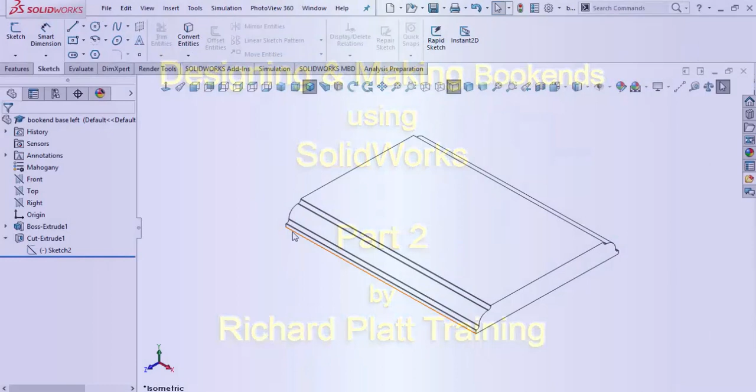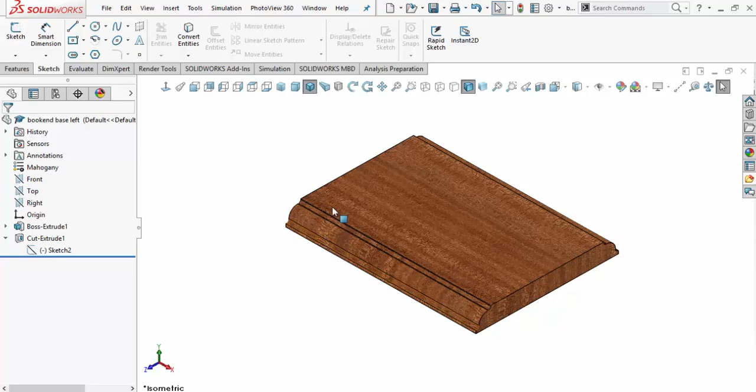Okay, now what we need to do is to make our Roman Ogee go in the opposite way. So it's going to be actually coming across the end grain. So let's go back and make sure we see our shaded view so we can kind of see what we got here. So I'll come back and click on that. Yeah, this is our cross grain right here. You always actually cut that part first when you're using a table router. So, well, anyway, we designed it this way, so we got to go back now, make that Ogee cutting across there. So I'm going to go back where I can see a little bit better.

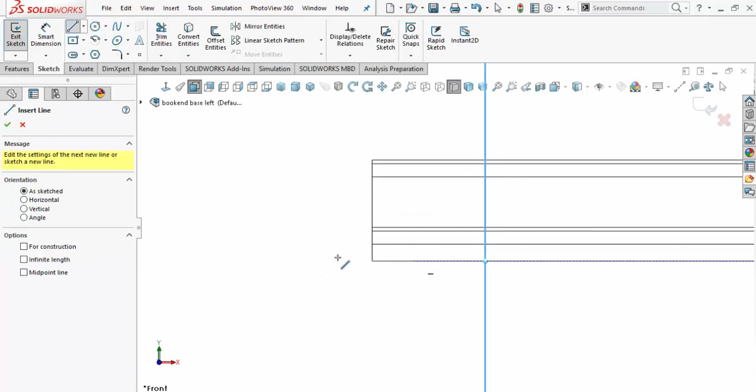All right. So now I'm going to hit myself on this one. Actually, let's go to the right view. Let's see where we are now. I don't want to go that way. Let's go to the front view. Yeah, that's what I want. Let's set ourselves normal to that. I'm going to teach you a new way to make an extrusion that might be a little different, but I think you're going to like it. So let's come up here and let's start designing our Ogee that goes across the cross grain.

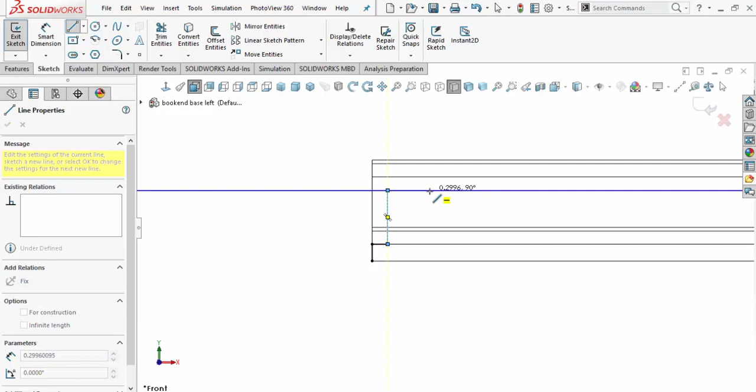So as I come up here and snap, you notice that at 90 degrees it says 0.2996. That's good. So we're going to go ahead and click on that. That's a good feature I can grab. I'm going to come over here to just about right there. I'm going to come up somewhere up in here and make one. I'll come over here and I'll just make one. And oh man, I kind of messed that up. So I go all the way up here to that. I'll put a point in. Now I'm just going to continue around, putting in these arbitrary points to make myself an enclosed shape.

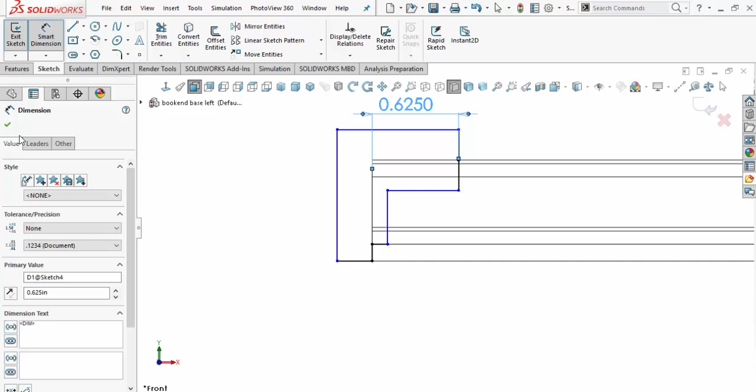Okay. Now let's set some smart dimensions up so we can make this guy work for us. I'm going to come up here on this line, come over here to the end of the wood block, and I'm going to set that to 0.625, which would be 5/8 of an inch. Come over and do that. Okay, that looks pretty decent. We already know that that's correct. What I don't know is this dimension right here. So I'm going to go ahead and I'm going to assume... I'm not going to assume anything. What I'm going to do is I'm going to just check that off, and I'm going to go back and look at that other sketch.

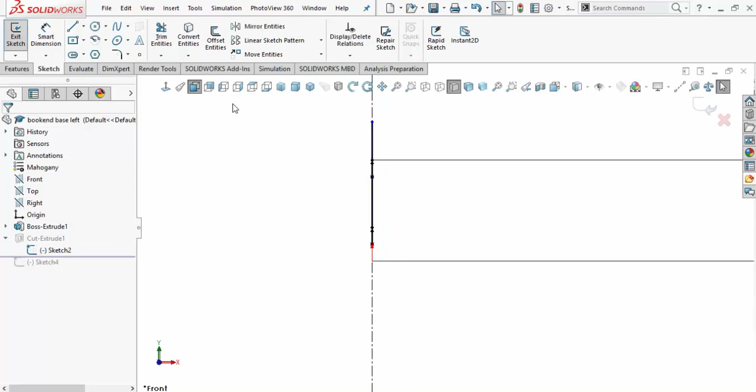So the way I would do that, let's rebuild this real quick. Got to make sure we get this right. So what I'm going to do is I'm going to come back up here, and I'm going to back up on my feature manager. I'm going to exit. I'm going to go ahead and select that sketch 2 and say edit. All right. Well, where is it? Okay. Let's go ahead and change it around here so we can see it. Ah, there it is.

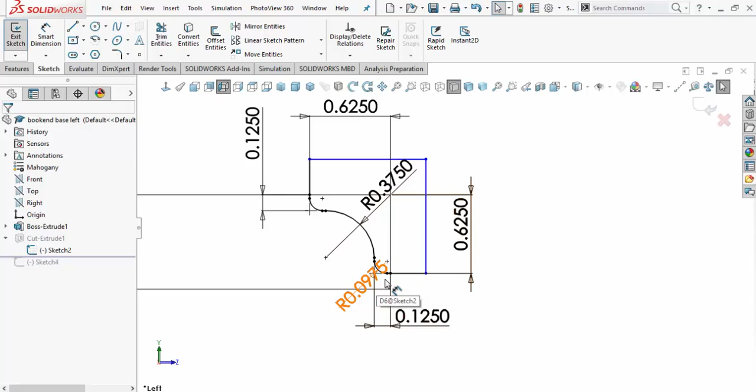Okay, so I set that to 0.625 here, and I set it to 0.625 there. Okay, I think I can figure this out. Got a radius on the Ogee of 3/8, which would be 0.375. And I've got my fillets at 0.0975. Okay, that makes sense. So we'll go ahead and rebuild our sketch. We'll go ahead and pull our feature manager down so we can see it and suppress it. We're going to go ahead and get ourselves back to, I think, our front plane we were working on.

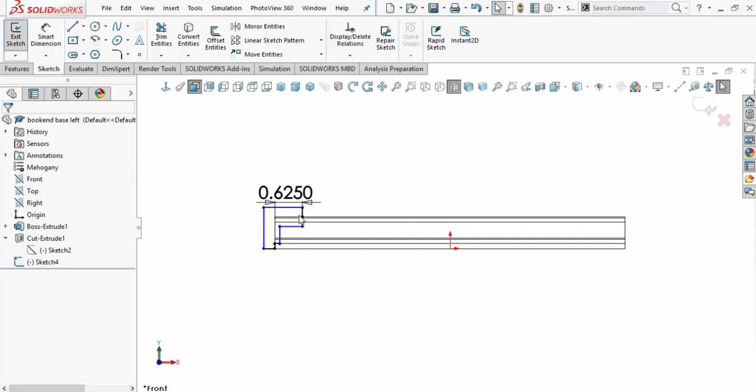Set ourselves normal to that, and we'll go back to sketch 4, and we're going to edit that sketch. Okay, let's see if this makes some sense now. So we know that's 0.125. All right, I think I got it. So we'll come back and do a smart dimension here. This is what was throwing me off, and we'll set that at 0.125. I think that makes sense. Yeah, it looks a little bit better. Okay.

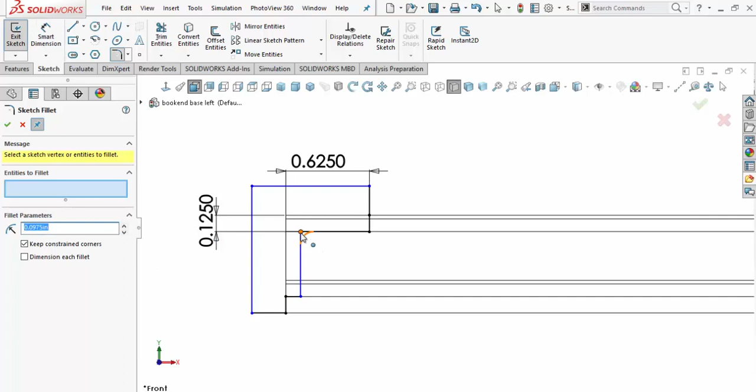Yeah. All right. So now we'll come back over here and do a fillet. If it doesn't work, we'll figure it out. No big deal. Click on that, and we're going to set that to 0.375, 3/8 of an inch. Okay, we got that in there. Now, what I want to make sure is that I'm set to, I think we set to points. We'll accept that one. We may come back and modify that, but hey, we're designing. It's having fun, right? So we'll go ahead and select this.

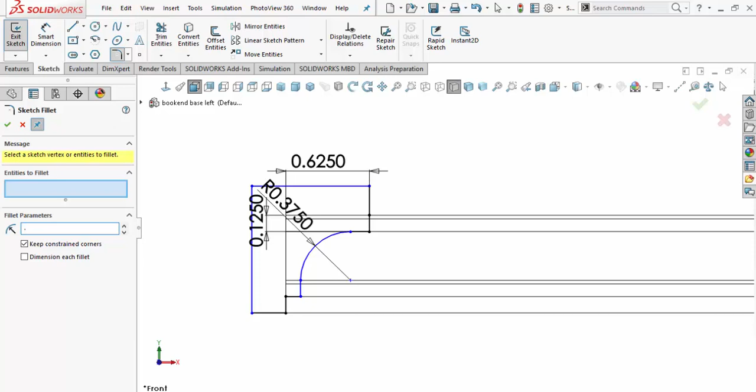I'm going to say 0.125 on a fillet. Oh, actually, no. 0.0975 on a fillet. We're going to click on this guy here, and click on that guy right there, and we're going to check that off. Okay. May not be exactly what we want, but we're going to find out anyway. So we're going to rebuild our sketch, and we're going to rotate this at an angle. Oh, wait a minute. We're right in the middle part. How are you going to handle that? Well, let's see what we can do here.

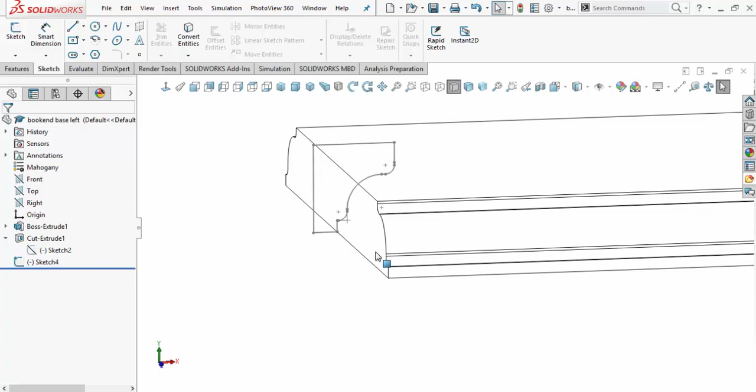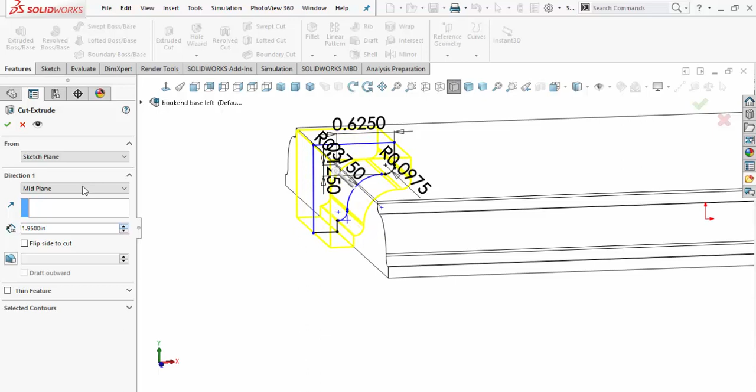Click on this sketch, make sure we're editing it. Go to Features, up here. We're going to do an extruded cut. Now, when I do that, it actually just goes one direction. Well, the cool thing about SolidWorks is I can say mid-plane. I can go both directions. And then what I can do is I can just increase the amount of that projection. Or I can say through all both.

Side to cut. And just playing with that. I don't want to do that. I'm just going to say, keep it at sketch plane. I'm going to say mid plane. And I'm going to say through all. Okay? So let's see what happens here. We hit that. Accept it. And there it is.

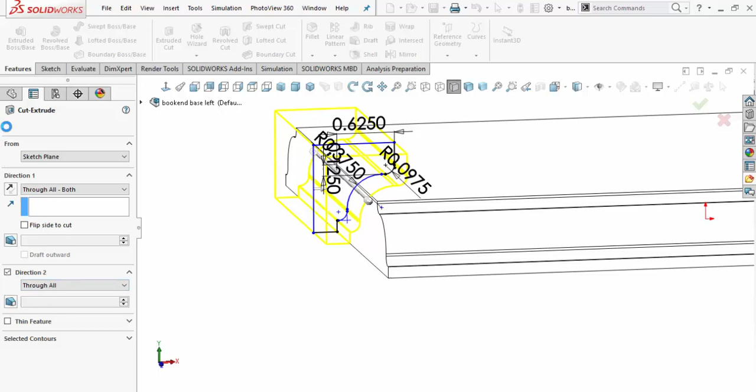Okay, we're going to rotate that around and look at it. Yeah, that looks really good. We're going to go with that. I like that. It looks kind of cool. So let's zoom out a little bit, kind of move this around. Wow, it looks really nice. You know, I was thinking about this earlier. I think what I might do is change my material type. I'm going to rebuild this guy real quick. Let's save what I've done so far.

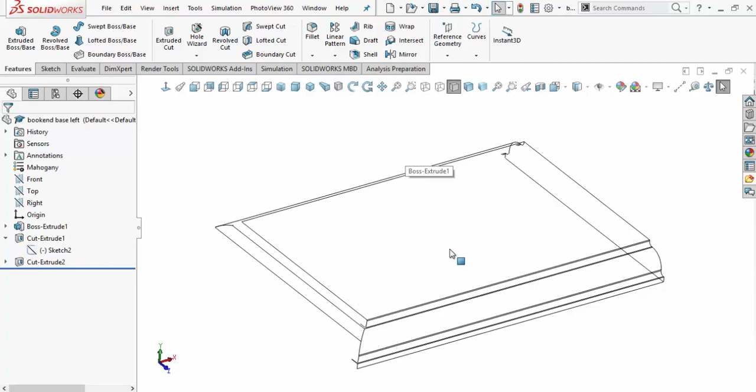My house where I live, I'm kind of going with a country western kind of style, because I'm from Texas, so I'm going to have kind of a Texas look. A wood that's really common in Texas is not mahogany, but it is actually red oak. So I'm going to go ahead and material, and I'm going to come back here to wood, and I'm going to say oak. Now, what's kind of funny is there's a lot of different kinds of oaks. There's white oak, and there's yellow oak, and there's red oak. I'm just going to go with oak.

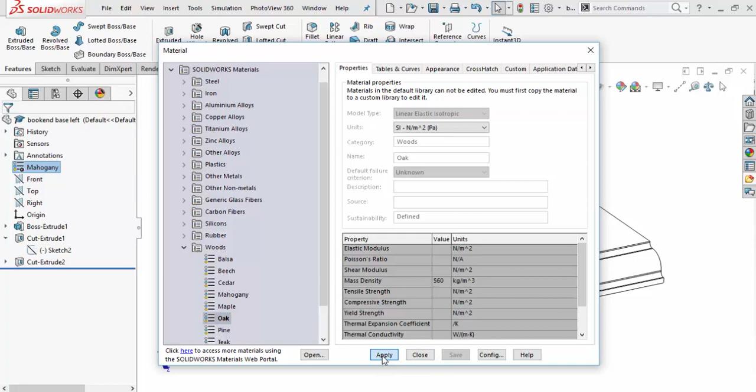This oak texture here actually looks like red oak. So I'll go ahead and select on that, and yeah, you can see that. Now I can probably change the grain on that face pretty well, but I'm going to leave that for right now, and we'll come back to this. Okay, part looks good. Rebuild it. I'm going to go ahead and save it. And we'll come back to this.